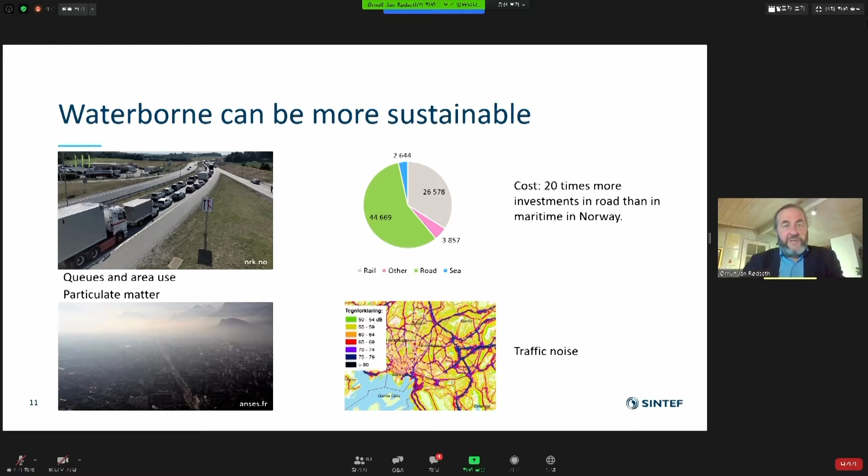So if we can make better use of waterborne transport, this can certainly help the sustainability goals of the cities. A very interesting point is to get a better utilization of the urban waterways. As I mentioned, a lot of the cities in Norway, as well as in Korea, are close to various rivers or the sea. And if you can build small boats that can replace bridges, you can get a much more flexible and cost-effective transport system, utilizing the waterways in totally new ways.

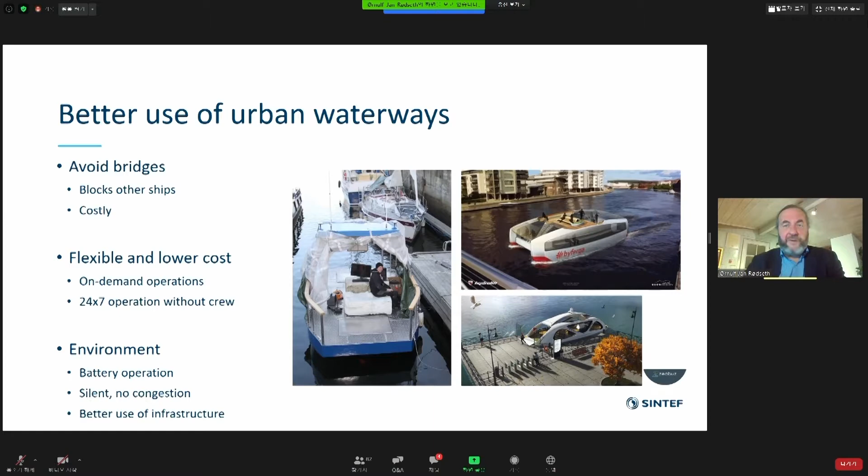So please come to Trondheim and have a look at that. It will probably have people on board for the first couple of years just to make sure that everything works as it should, but still the aim is to have a fully unmanned, on-demand ferry. It's about 60 meters crossing over a river, but you save about 15 minutes walking. So it's a very nice concept. This is something I've seen myself in, for instance, Busan. There's a lot of waterways that could be utilized much better if you have solutions like this. Certainly smart.

Another problem we are seeing in Norway is that the port areas in the cities are under pressure. It's high value real estate. They use a lot of area, and in the most attractive spaces. So many of the ports in Norway are now considering moving out of the city center to the outskirts of the populated area. And that, of course, causes a transport problem from the port to the city. The picture is from Trondheim.

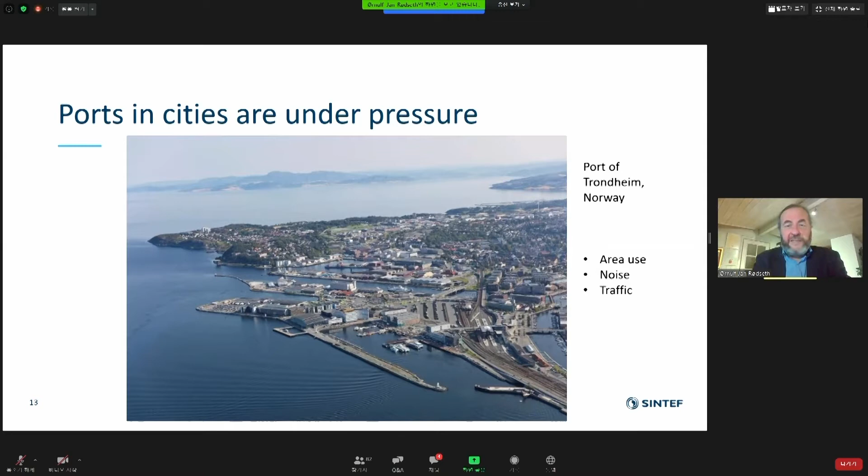So one of the projects we are looking at is: if you move the port out of the city, how do we transport the cargo into the city without using trucks? Again, smaller shuttle vessels sailing in protected waters fully autonomously seem to be an interesting option.

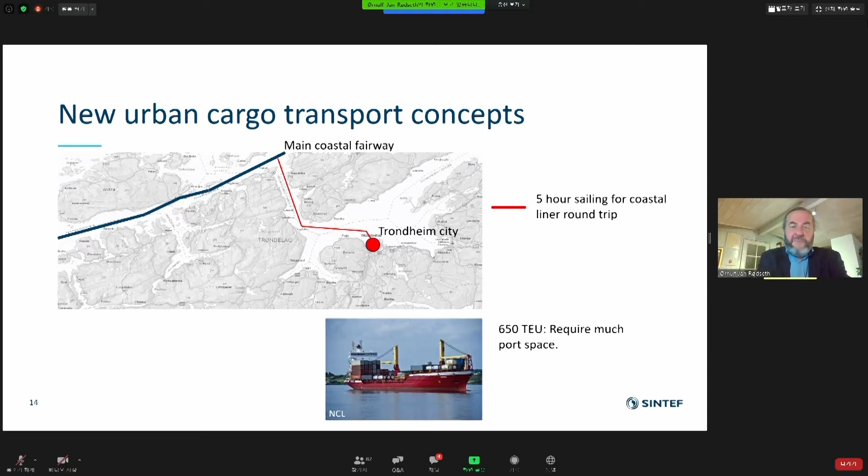We have a project based here in Trondheim. This is a research project, so we will not demonstrate it, but the point is to move the port out to the main fairway, and the big ships will save about 5 hours sailing into Trondheim and back again. While we can replace these with smaller unmanned ships with electric propulsion, very silent and small enough that you don't need the big terminal areas. It's more about delivering a container on the quayside and getting it up into the city immediately. Again, a very interesting proposition, I think.

And again, something that, for instance, could be interesting for Busan, which has moved the container port out of the city.

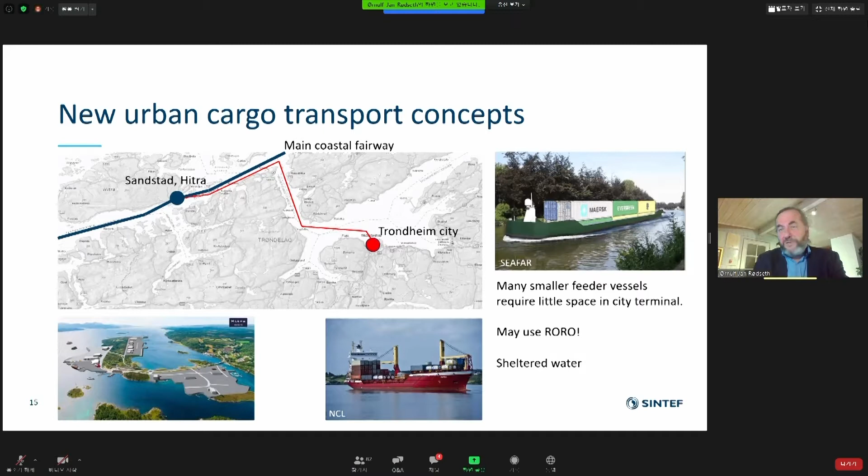So, to conclude, there are very rapid developments today in the area of autonomous ships. Some of you may have listened to the summit yesterday, and I think the basic conclusion we made there is that this is going relatively fast, although there is still some worries about how to use these systems in various applications.

It's a very high sustainability focus, both in terms of fuel use, but also in building new types of infrastructure. In my mind, autonomous and uncrewed ships are a game changer. It's disruptive technology that can change transport, at least waterborne transport, totally from what we are used to today. And one part of this is the sustainability focus on new types of infrastructures, which are more fitting to modern cities and the needs we will have there too.

Autonomous ships, new developments, offer new opportunities which are very interesting in my mind, at least for waterborne transport in cities, both for passengers and for cargo. So, thank you. That was my message for today.

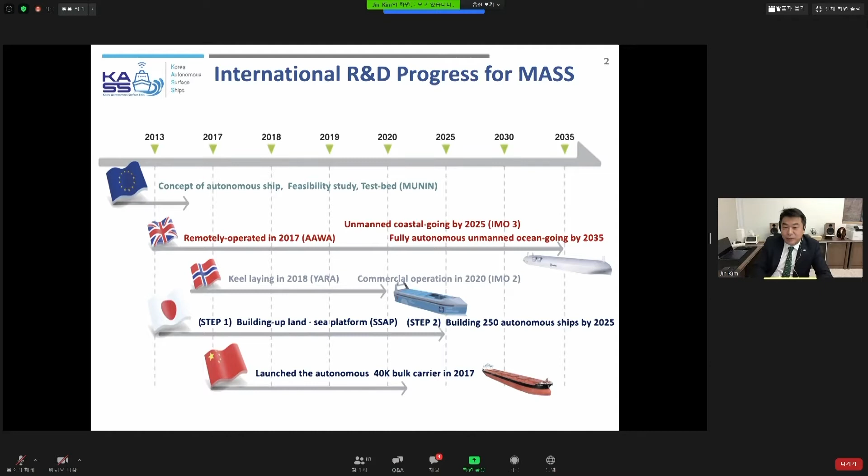Japan and China are also developing very similar concepts of autonomous ships.

Korea started the Korea Autonomous Surface Ship project, KASS. The project is jointly funded by the Ministry of Trade, Industry and Energy and the Ministry of Oceans and Fisheries, to develop MASS technologies consisting of 4 key technologies with 13 sub-projects. The time frame is 6 years total, from this year to 2025.

The vision of this project is for Korea to take the lead on future market share and international standards for autonomous ships. The first technological objective is to develop MASS equipped with an intelligent navigation system that meets IMO autonomy level 3 for ocean-going operations, and level 2 for coastal operations.

We will make efforts to achieve global level reliability and standardization, expecting Korea to take the lead in MASS market share. For these objectives, we launched the National KASS project, consisting of 4 key technologies: autonomous navigation system, autonomous engine system, sea test bed and validation technology, and operation techniques and standardization.

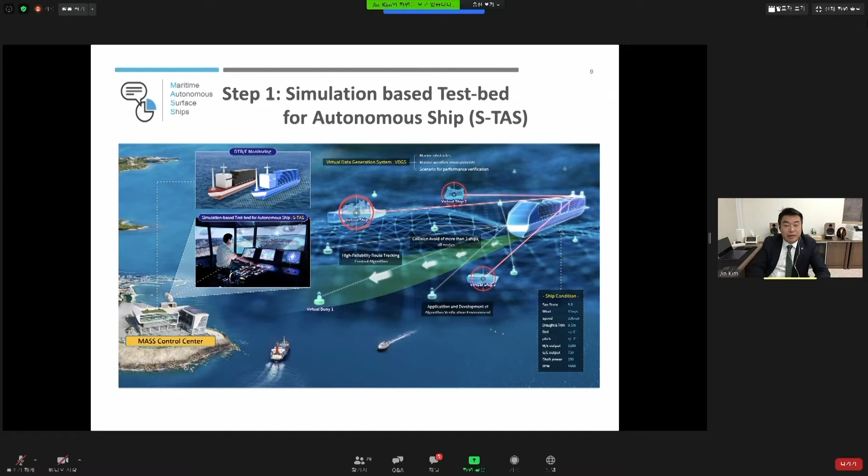The S-TAS system will be equipped at the MASS Control Center on shore. The next step is testing a real ship in a real ocean environment, where real ship and ocean conditions replace the virtual conditions of the simulation-based system.

Two real ships, a 24-meter class small test ship and a commercial ship provided by a participating shipping company, will be tested in this project. We can use both VDGS-generated virtual obstacles and real obstacles together.

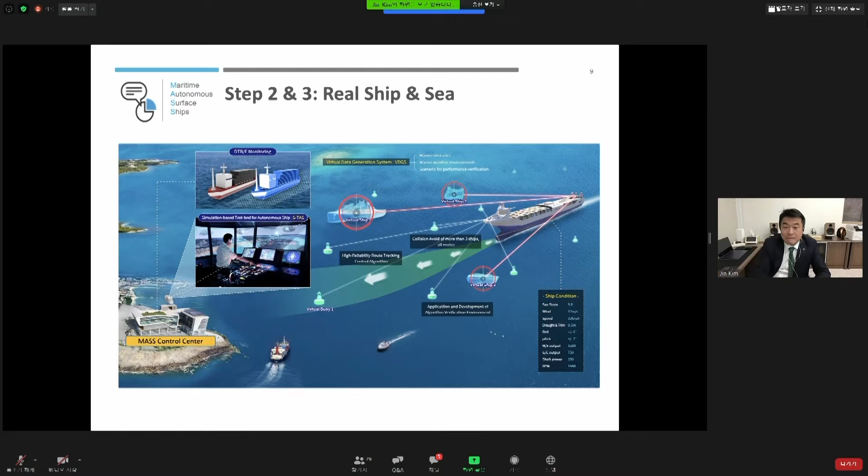The sea test bed, including the MASS Control Center, will be constructed at Ulsan City, on the southeastern coast of the Korean Peninsula, very close to the Ulsan shipbuilding yard of Hyundai Heavy Industry.

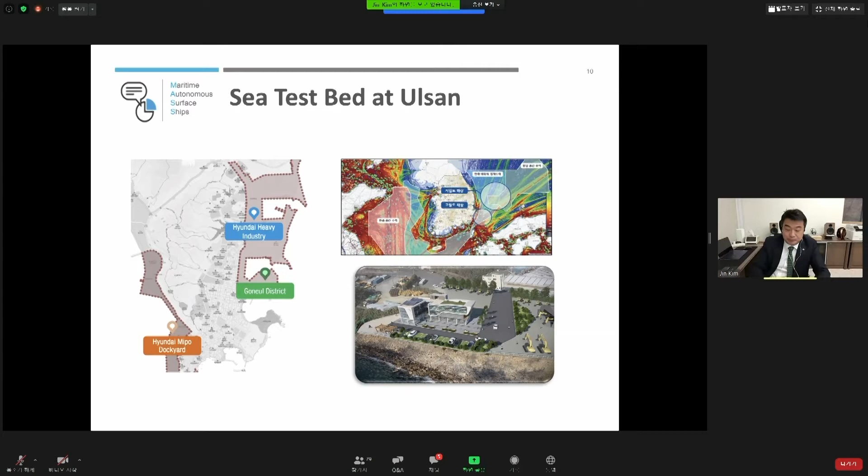However, the engine automation system is not easy to test and validate with a small test ship. So, at this stage of technology development, we'll use an actual full-scale size main engine within a simulated environment.

Various big data, including intentional and unintentional malfunctions, will be collected. This big data will be used to develop a condition-based management (CBM) solution with AI technologies.

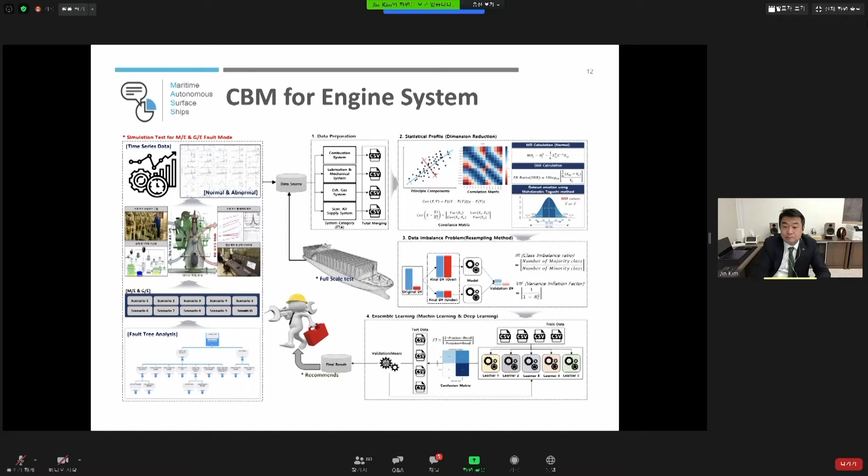The digital bridge and platform on the shipboard, and the digital twin bridge at the MASS Control Center, will communicate using various types of communication systems. We also developed a cybersecurity system, which will be applied and tested for both the digital bridge and the digital twin bridge.

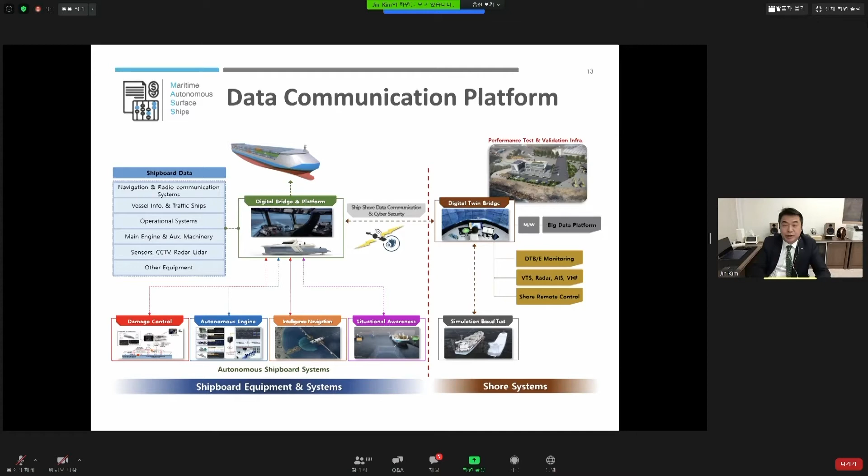The shipboard digital bridge collects all data and intercommunicates with the intelligent navigation system and engine automation system. The digital twin bridge at the MASS Control Center collects all shore data, including VTS information, operates a big data platform, and will have remote control ability in emergency situations.

This is the concept drawing of the sea test bed at Ulsan City. The Mass Control Center will have a digital twin bridge and a big data platform, communicating with the shipboard digital bridge. We'll develop test scenarios and procedures to validate the intelligent navigation system and engine automation system, including cybersecurity.

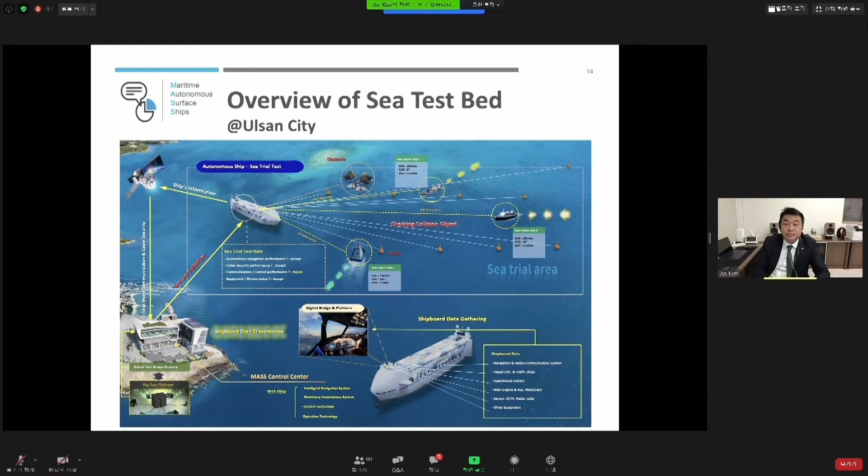The Korean private companies will have R&D products such as engine automation system, situation awareness system, intelligent navigation system, and communication system, etc.

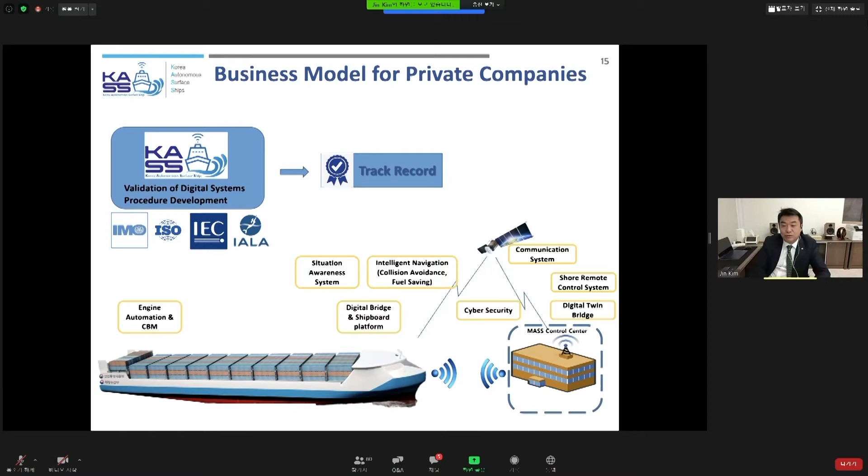The commercial operation of MASS in the future will strongly depend on how to get accreditation or approval in safety and security points. The KASS project will develop procedures for checking and validating all digital systems of MASS. We would like to cooperate with other nations to make the international standard of MASS verification, validation, and accreditation. The project will help participating Korean companies get the track record to build their own business models. Thank you.

Thank you, Dr. Jin Kim, for the wonderful presentation. It's really exciting to hear there is going to be actual shipbuilding to test autonomous ships. Before we move on, I have one small question for both Jin Kim and Arnov. Jin Kim, I know you're already collaborating with Norway on autonomous ships. Where do you see that collaboration coming to an early stage?

Actually, we are doing very similar research work in both Korea and Norway. At this moment, I would like to suggest two types of cooperation. The first is about the validation of the MASS digital system. We've all heard of successful operations of MASS, even unmanned ones. However, there is no procedure or validation method to get approval for international voyage yet. So I would like to cooperate to set up a procedure for validation of the MASS digital system, for example situation awareness or collision avoidance.

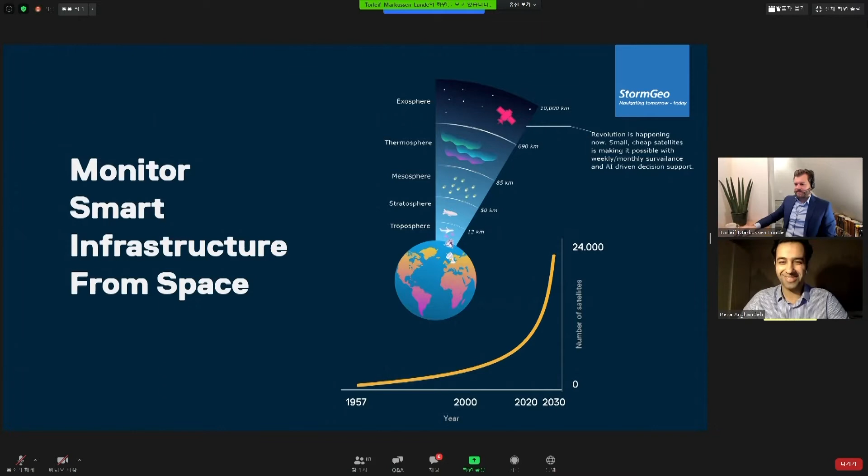When it comes to the electric grid, we see vegetation as one of the major reasons for outages and basically faults or some kind of risk in electric grids. The reason is that in a lot of places, the transmission and distribution lines pass through cities, fields, farms, mountains, and nature, and they get exposed to the vegetation.

In a lot of cases, these locations are far or hard to reach, or maybe because the network is so big, so vast, it's not easy to check every point of the grid. Electric utilities around the world spend between $50, $60 to $1,000 per kilometer of line for inspection and cleaning the power lines regularly.

And the way they do that is basically by dividing the power line right of way into different zones, like the awareness zone, notice zone, and alert zone, where the tree or branch gets so close to the line, and they try to keep the line clean.

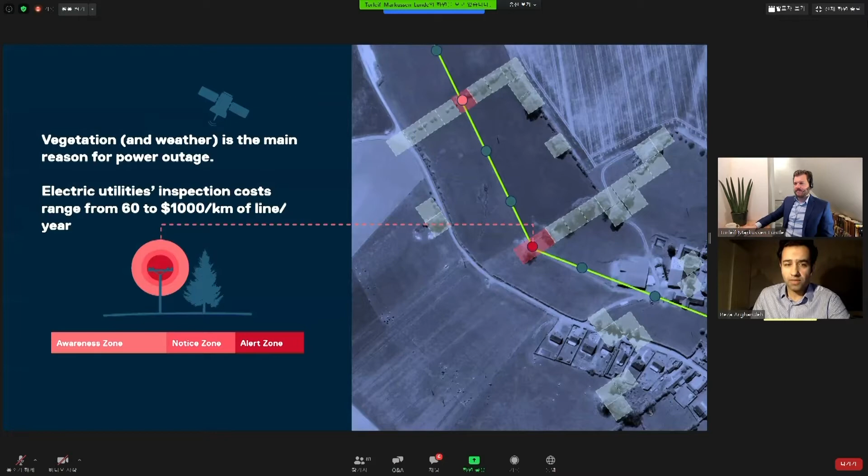So we developed an artificial intelligence algorithm to automatically extract the vegetation location - where it is, how far it is from the line, and how much risk it poses for the electric lines in different environments and vegetation coverage. To give you a sense of how this algorithm works, on the left-hand side we have this animation, and you can see a sliding window move along the line and look at the satellite imagery, measuring, characterizing, and calculating a risk function based on the threat from vegetation around the power line. It then comes up with a color code similar to what you'd see on Google Maps or navigation software showing traffic congestion, but in our case we provide vegetation-based risk for power lines.

In that way, as you see on the right-hand side, we picked an area again in the western part of Norway, because we are working with the electric company there. We show that we provide this kind of risk-based map for the grid operator, and they can see red zones where they need to pay more attention to vegetation and provide more insight. You can see that 95% of the locations are clean - they're green - meaning they don't need to send a helicopter, ground patrol, or drone to do inspection and spend a lot of money and time getting this imagery. With one satellite image, at a fraction of the cost, we provide them situational awareness, so they can optimize their costs and just pay attention where it's needed, maybe sending a drone or helicopter only to the red zones.

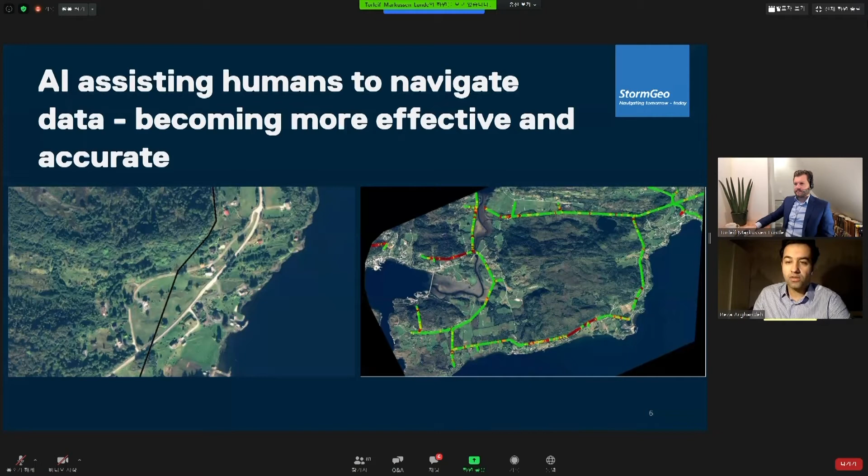We also went beyond vegetation management for the electric grid. We looked at urban areas too, and tested our satellite-based AI algorithms for estimating the impact of hurricanes and storms on cities. For example, for Hurricane Michael in Florida, we used these algorithms to see the level of hurricane destruction on a city after the hurricane.

Just to show you an example, the left top image is part of a road, and the left bottom side is what a machine using our algorithm will see in that area. You can see the color code - the light color shows the location of trees, the roadway, and the buildings. After the hurricane, we can clearly see a tree cut the line, cut the roads, and consequently cut the power lines, causing a road closure and power outage. Using this satellite imagery technique, we could estimate the destruction of the hurricane across the whole city very quickly.

The reason we are interested in and believe in using high resolution, high quality satellite imagery rather than drones or helicopters is that after a massive natural disaster, because of weather conditions, drones may not be able to operate. They're also limited by battery range, size, and other technical aspects. However, with satellites and technology like SAR, which can go through clouds - even if we have cloud coverage as an obstacle - we can get a very clear and reliable image of the situation on the ground, even after disasters.

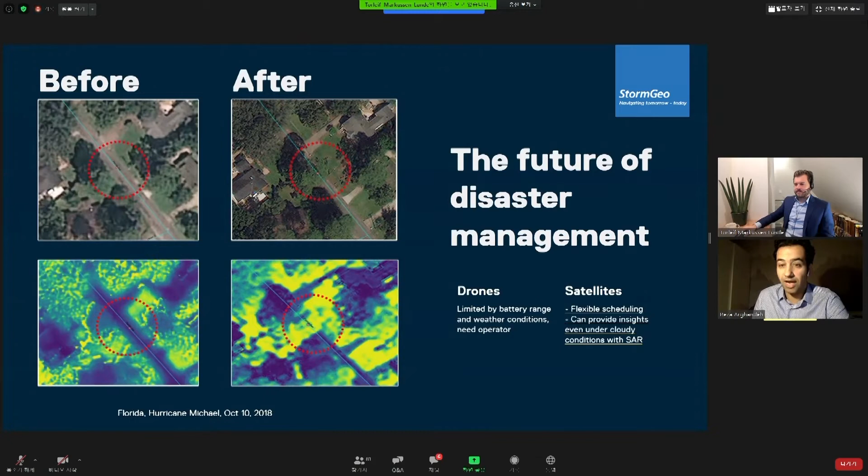I think that's it. Torleif, anything else you want to add? No, I think that was very good.

So that is one of the areas that we work on, combining the weather data together with information on where the vegetation is, adding another dimension to get a good understanding of the risk.

I would say a thriving, functioning port is key to a smart city. And likewise is data sharing and utilizing the data you have at hand to automate and make the city smarter. So I think the port, just like the water and the waterways mentioned earlier today, and the ports and the shipping industry, is a very important part of making a city smart.

So to mention a little bit about what StormGeo do today. For the shipping industry, you typically start with the planning of a trip, or maybe multiple trips, and then you have the possibility to optimize around the planning. Today we do a little bit of work here, but the majority of the services that StormGeo provide today is in the ship operations part - that is after you have left the port and when you're on your way to the next port.

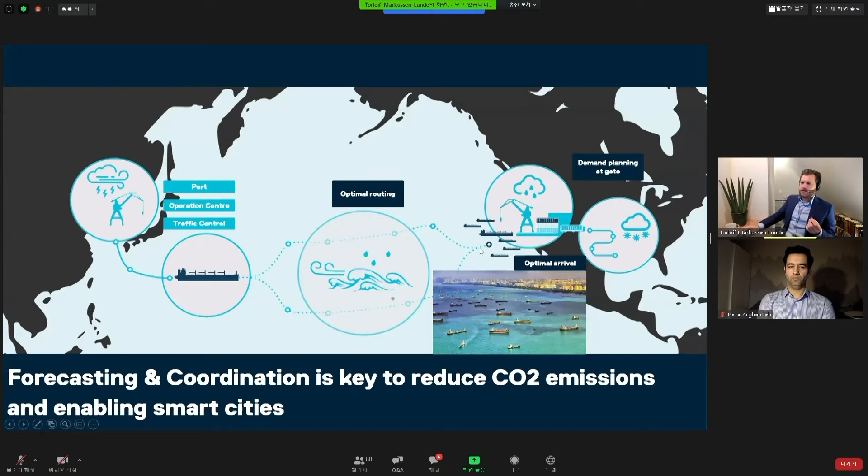To finish off with this slide here, to repeat the message: the shipping industry and the ports are an essential part of the smart city, and so is the weather. Optimizing for the weather, optimizing the ports, optimizing the shipping industry is key. And we at StormGeo see that to enable this reduction in emissions and the smart cities, there is a need to collaborate and share data, and we are definitely looking for partners and willing to do that.

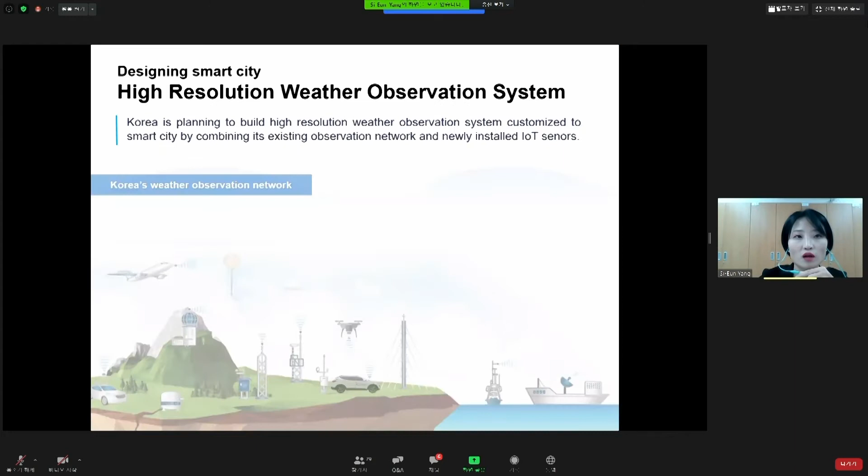The first project's title is Designing Smart City High Resolution Weather Observation System and Weather and Climate Platform - the title says it all. The first task is designing the smart city high resolution weather observation system. As you can see in this picture, Korea has a very well equipped meteorological observation network - over 600 surface observation stations, 15 weather radars, 25 upper air observation stations, and marine observation stations as well. Recently, we even have a meteorological satellite, which means we have a very dense meteorological observation network, much denser than the WMO recommendation.

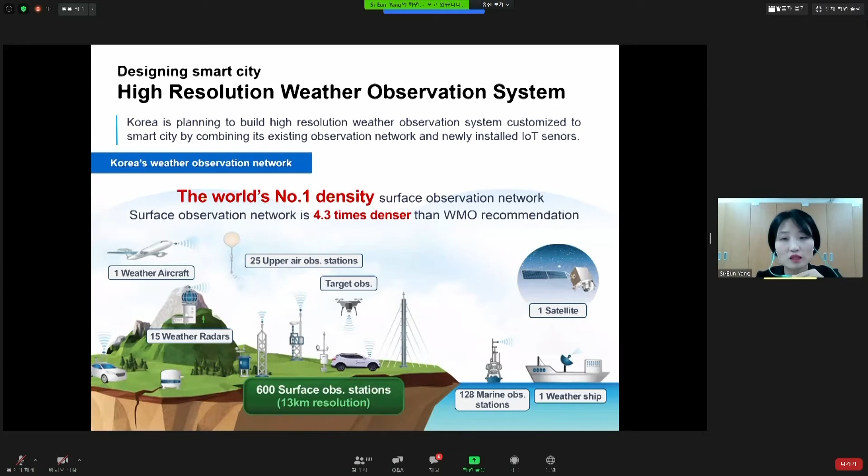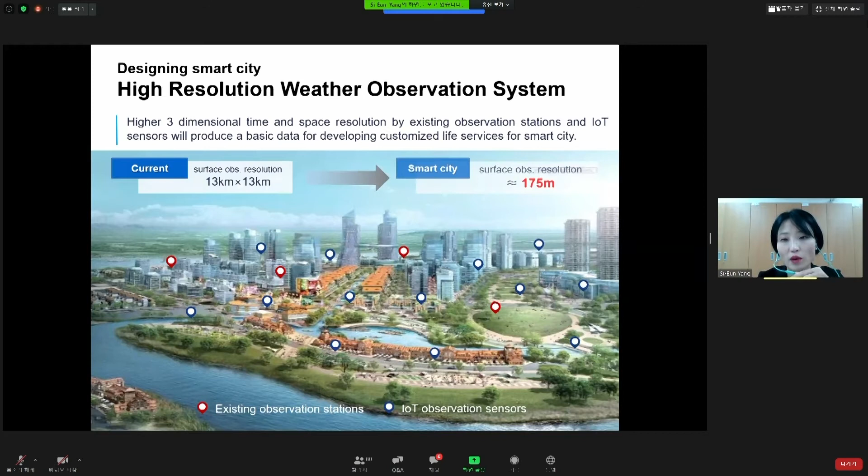What we are going to do with this existing observation network is combine it together with the newly installed IoT weather sensors. Let's say this red dot is the existing observation station, and following the implementation plan of the Ministry of Land, Infrastructure and Transportation in Korea, they are going to build much more IoT weather sensors in the National Pilot Smart City. By combining these observation networks together, we could improve the resolution of the observation network, currently from 13 by 13 kilometers up to 175 meters, which is very dense and high resolution.

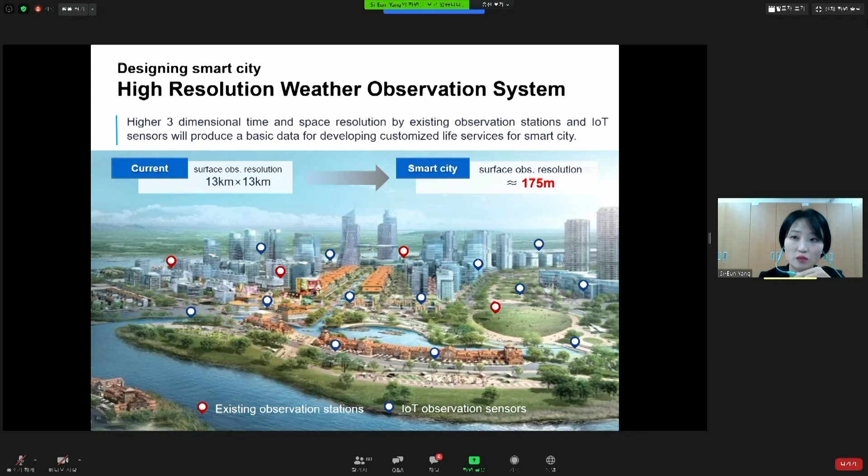So what do we need to do next to build this high resolution observation network? We need to develop technology to converge these two observation networks together, because the IoT sensors don't have a standard methodology when they observe the weather event. So we need some technology to connect this data together to make it the same standard.

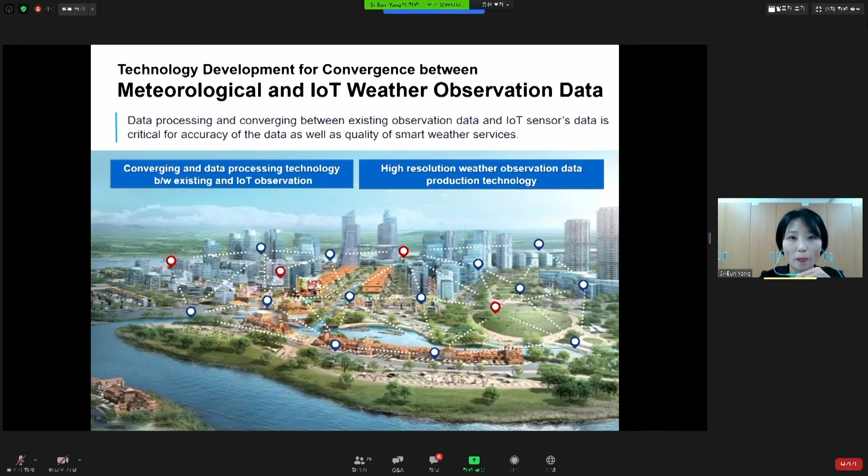And to secure the accuracy and reliability of the data, what we need is quality control. So our research project also contains this quality control methodology development. And how could we do that?

First, we are going to do comparative observation with the two IoT sensors together with the existing observation station, at least for 3 months. By doing so, we will see the accuracy of the data from the IoT sensor, and we will also check the error range.

We are also going to develop the QC algorithm and verification methodology. Actually, KMA already has our own QC methodology, so based on that, we are currently designing the prototype for this methodology and algorithm as well.

And the last thing would be building metadata and the standardization methodology. I'll introduce this later, but we also have to connect this massive observation data to other data platforms, so we need this job as well.

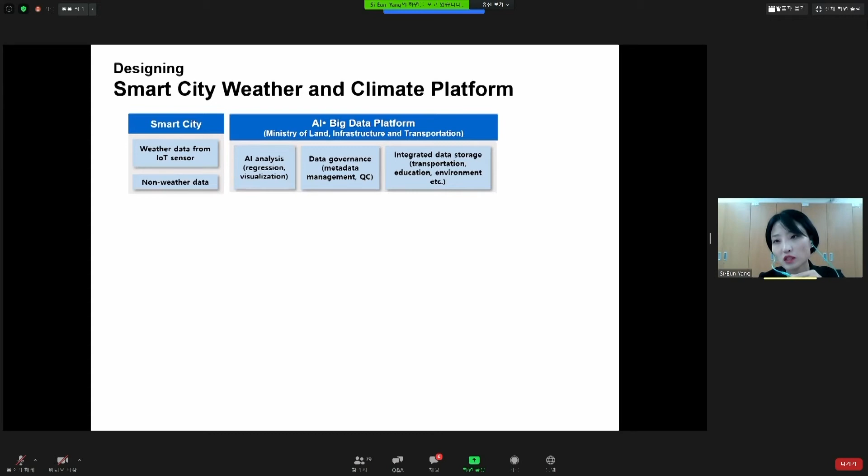And the next task for this project is designing a smart city weather and climate platform. The Ministry of Land, Infrastructure and Transportation, which is the major entity for developing the National Pilot Smart City, is going to build the AI big data platform.

This platform will integrate all the data needed for the smart city, such as transportation, education, environment, healthcare, and so on. They are going to use AI analysis and extract meaningful information for users in the smart city.

And what we are going to do with this big data platform is use our existing observation data and newly collected observation data from the IoT weather sensor. We will integrate it and upload all this data into the smart city weather and climate platform.

And this platform also has a meteorological digital twin. I will go over this later.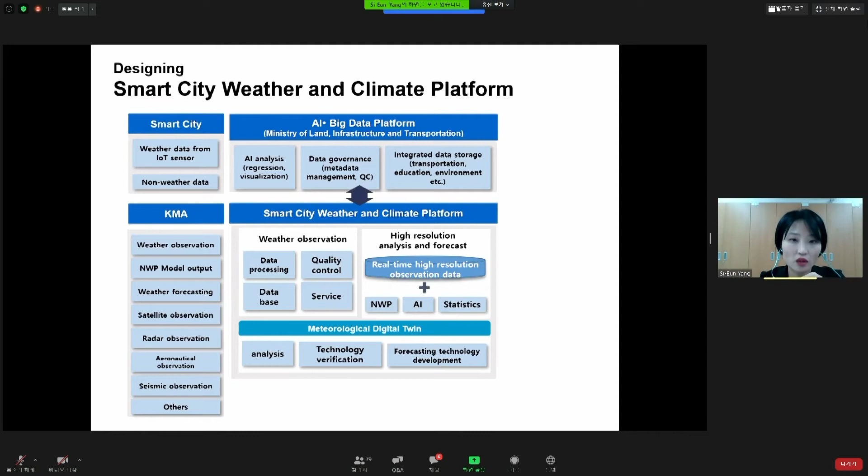We are going to connect this weather and climate platform with the AI big data platform, and also the meteorological disaster prevention portal operated by KMA, and the weather and climate big data center operated by my company KMI. And we will provide meaningful information to the users.

And next is our second project. The title is Prototype Development of Smart City High Resolution Weather Analysis and Forecast System and Weather and Climate Convergence Technology.

So in the previous project, we designed the prototype for the high resolution weather observation system. What would be the next stage? The next stage would be weather analysis using this observation data to produce forecasts. So this project is about that part, and how we could do that.

We are going to use mainly three technologies. The first is the numerical weather prediction model, which is commonly used to produce forecast information. We are also going to use the newly collected urban weather information from the IoT weather sensors, and apply cutting edge technology like AI or deep learning. By doing so, we are going to develop a high resolution 3D weather analysis and forecasting system.

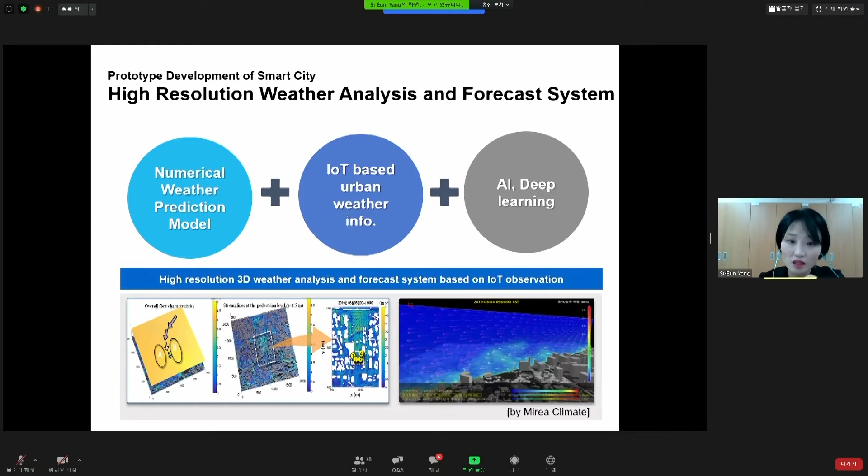And I'd like to show you a short video clip about this. I hope this will look good for you.

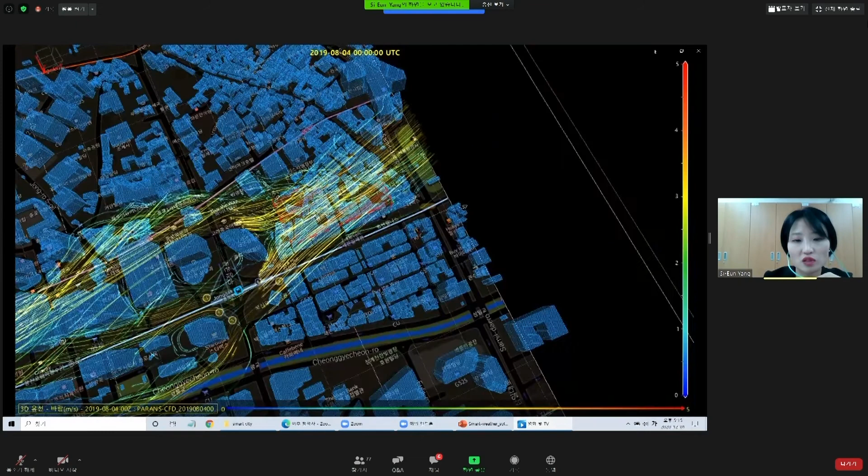This is a 3D map, and on this map we visualize wind direction and wind speed, and by color we show the temperature. So by using this kind of 3D observation, forecast and analysis system, we could see certain urban areas' weather conditions, and provide much more customized weather services for users in the smart city.

And the next task for our second project is prototype development and demonstration design of weather and climate convergence technologies. So what we need to do is identify what kind of weather services are required and needed for the smart city.

So in this R&D project, we are developing the prototype for fog detection based on AI. As you can see, by using the CCTV image...

We could detect the fog condition, and also one of our research partners, World Tech, is developing a road weather risk service also using CCTV images. We could extract weather conditions like this using some algorithm, and also give warnings for those who are driving.

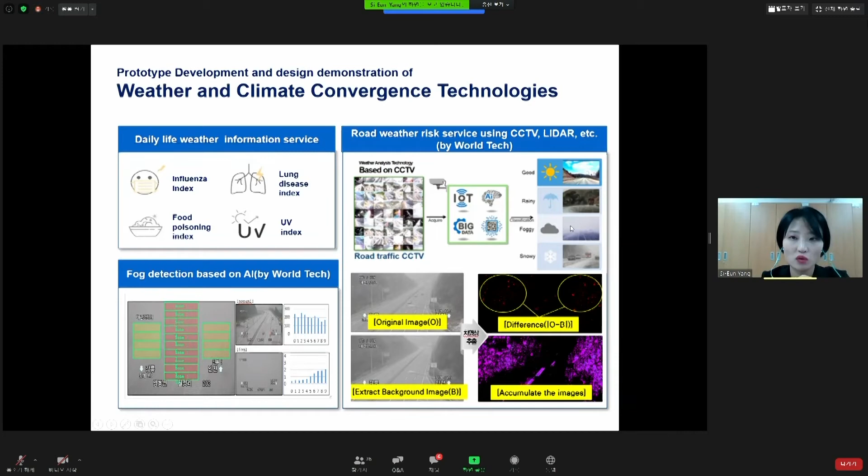And the last task is designing a digital twin for meteorological research. I'm pretty sure everyone knows what a digital twin is.

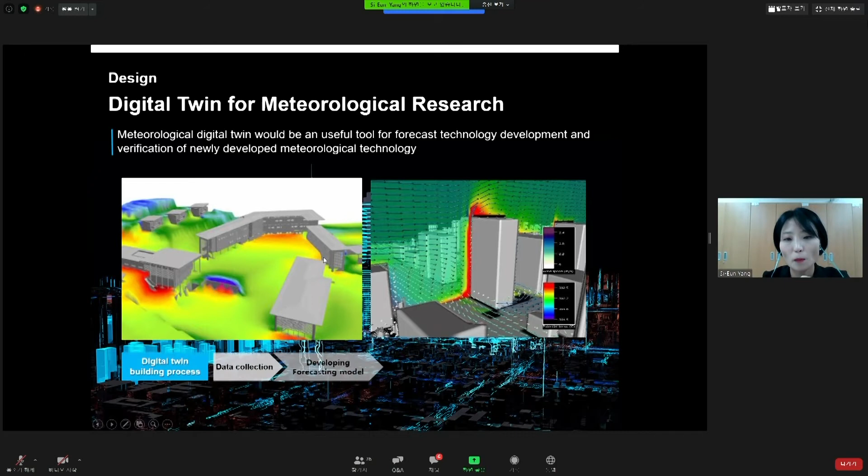What we are going to do with this is use it as a test bed for our newly developed forecasting technologies. By mapping results from our simulation or new technology, we could visualize and simulate the actual data from our newly developed technology. So this is what we are doing.

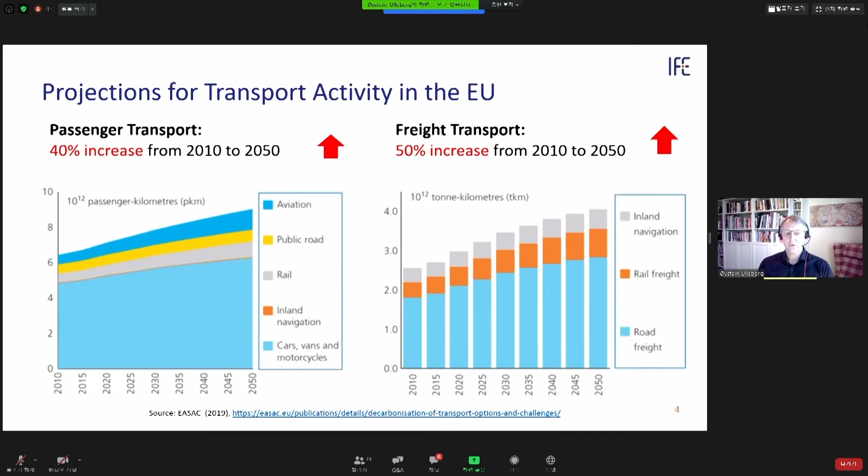To put it in context, we are able to reduce greenhouse gas emissions in Europe overall in the stationary sector, but we have challenges in transport. The projections for Europe actually show a quite significant increase—they're planning for an increase in total passenger traffic, as you see to the left, and also significant increases are expected in freight transport.

Obviously there will be challenges when we want to go to zero emission. I did a back-of-the-envelope calculation last year: what if we converted 250 million passenger vehicles in Europe to battery electric? That would be a tremendous challenge, because we'd need as much charging capacity as we currently have in total power production in Europe. So maybe not so realistic.

The rest of the talk, I'll speak about hydrogen. We also did a calculation to put it into context. If we rolled out hydrogen to a fraction of the fleet—today there are 6 to 7 million trucks and about 1 million buses—what would happen? We would have to put up quite a few hydrogen refueling stations. We've started this, but it's a huge task.

In Norway, the targets are to fast-track this. Since we have a renewable energy base close to 100% on a good year, we export hydroelectric power through sea cables down to the Netherlands and Denmark, and we're part of the Nordic energy mix. So we're in a very good position, with a lot of hydroelectric power and more wind power being built. That makes it easier for us to move quickly toward this electric situation, including electric transport—either battery electric or hydrogen electric.

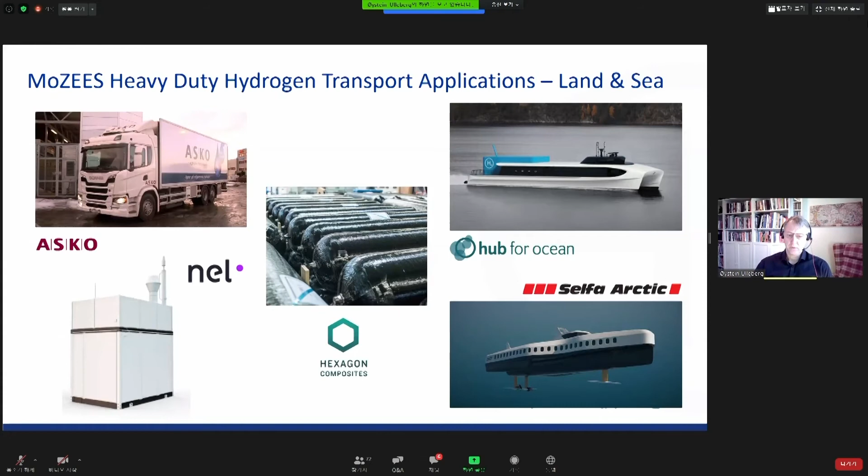I won't go too much in detail on this project, but I would like to bring to your attention that we started very early in Norway to make the system ready for hydrogen vehicles. Personally, I was involved in the light-duty vehicles. We had a development on a small battery electric vehicle that was rebuilt for hydrogen operations.

So we have the HY registration signs, and that applies then for the small-scale vehicles. We only have about 160, 70 passenger vehicles on hydrogen. But now there seems to be a stronger interest for the trucks and the buses.

So that's why I would like to take you into this, just to give you some examples of what we do in terms of maybe a little bit more high-level research for this audience, but we of course do detailed research all the way down to the component level and system development.

So one study we did was to see how it would look if we designed a system with water electrolysis along the route, so have some stations built in Oslo and in Trondheim, and then also along maybe a midway point. So we looked into this in detail to see what's possible with fuel cell electric trucks.

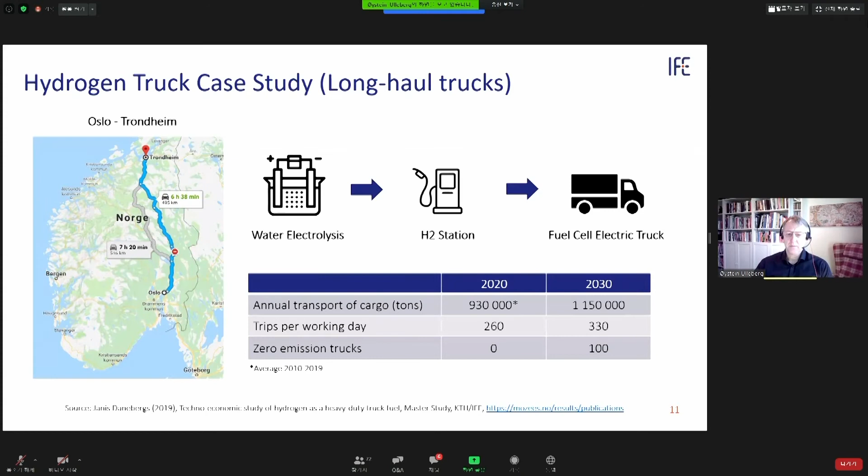And we looked at the transport demand today and the projection for 2030. Today, of course, there are no zero emission trucks. And then we said, okay, what would happen? Is it feasible, techno-economically feasible to do this with 100 trucks in 2030?

So then what you typically do is you look at the profile. We have tools to estimate the energy demand for these routes, and with more sophisticated technology it's very easy to do this these days. We can have simple or more sophisticated models of the vehicles to estimate the energy demand. And we figured out that the fuel demand for hydrogen was about 40 kilograms for this route.

So we are collaborating internationally with some partners on this vehicle modeling. I don't want you to pay too much attention, you can have it for future reference, but this lower left-hand figure shows when it is cost effective. Basically everything to the left of the black vertical line, where it breaks the x-axis at about 70 Norwegian krones per kilogram of hydrogen, is cost effective.

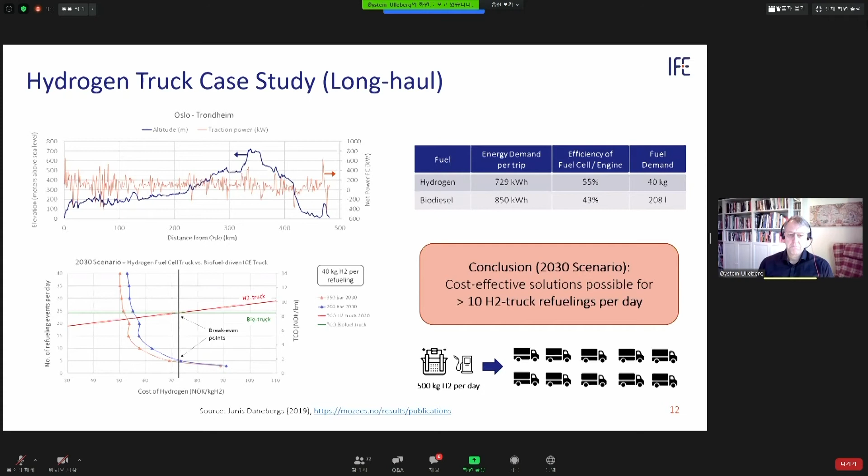This is the 2030 scenario. We weren't able to produce this plot for the 2020 scenario or the 2025 scenario. But what's interesting about this is that with the learning curves we see on the hydrogen refueling stations and the trucks, which are quite realistic according to our research...

Then it is possible to design a complete system where you have the trucks and you only need 10 trucks per station. So a relatively small station of half a ton of hydrogen per day would then suffice to get this cost effective. And this is very interesting.

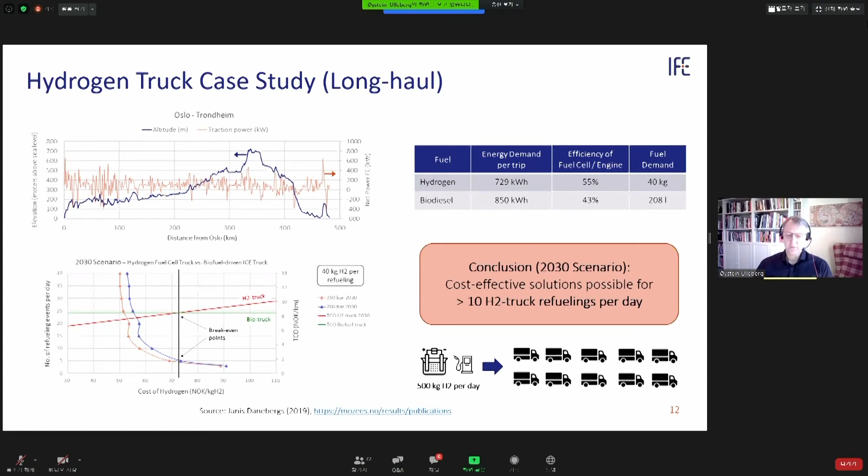And this complies with our theory that we need to think holistically when we build up these fleets, and build fleets first, because to make the production of hydrogen cost effective, you need a certain throughput. We've previously shown that you need about a ton a day to make a cost-effective station, and that station needs to be quite frequently visited. So building up infrastructure for fleets is a good solution.

We've also looked at this region, the Oslo region. The Oslo region, the capital region of Norway, including Viken, has a population of maybe 1.5 million, a little bit more. And there's a lot of traffic going through.

So we wanted to look at this, so we did a feasibility study earlier this year, and we're continuing this project now. We had some data from about 1,000 trucks. It's only 5% of the fleet in Norway, but at least it's a quite significant statistical amount. And we interviewed operators and looked at some scenarios.

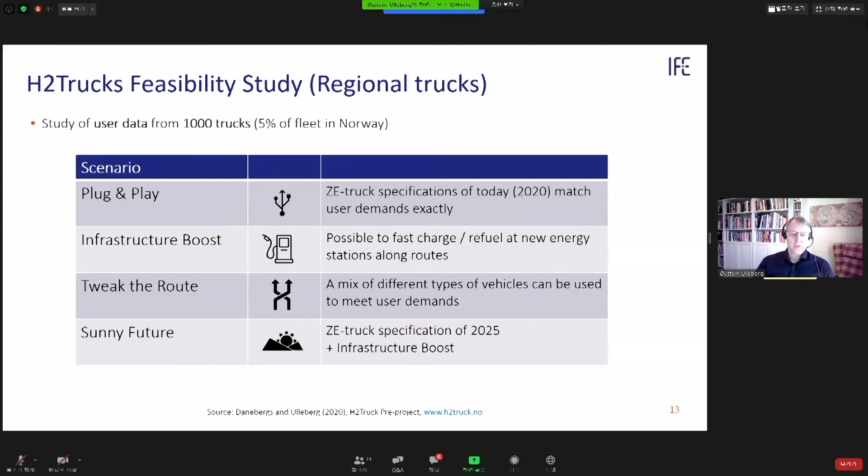So then we made an assessment based on technology availability, both on the vehicles and the fueling stations and the charging, fast charging for the batteries, and driving range, weight. Some trucks carry more weight, some carry more volume. We've looked into the details, and we are continuing these studies now for the capital region, because the city of Oslo is very interested. They actually have a plan now to implement zero-emission trucks in the capital region.

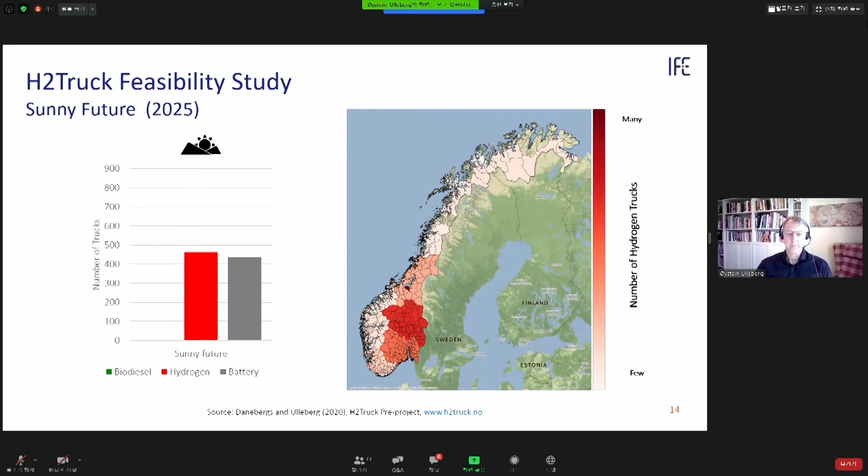Since this is such a big effort, we have joined forces and made a spin-out project out of MoZEES together with some key research partners, including SINTEF, the Transport Economic Institute, and the university in Trondheim. We are now looking at the three major regions in Norway: Bergen, Trondheim, and Oslo, and all the corridors between, to do an overall optimization of how we can solve the problem with battery electric and fuel cell electric.

Last example is on zero emission buses. Very ambitious strategy: the city of Oslo just announced that they will go for this. It's been politically decided that by 2028, there will only be zero emission battery electric and fuel cell electric buses. It's hard to say what the fraction will be. Right now we are mainly looking at battery electric buses because of technology availability, but we've looked at the whole fleet and see that there are quite a few routes that will have challenges with going battery electric, plus there's a heating demand in the winter.

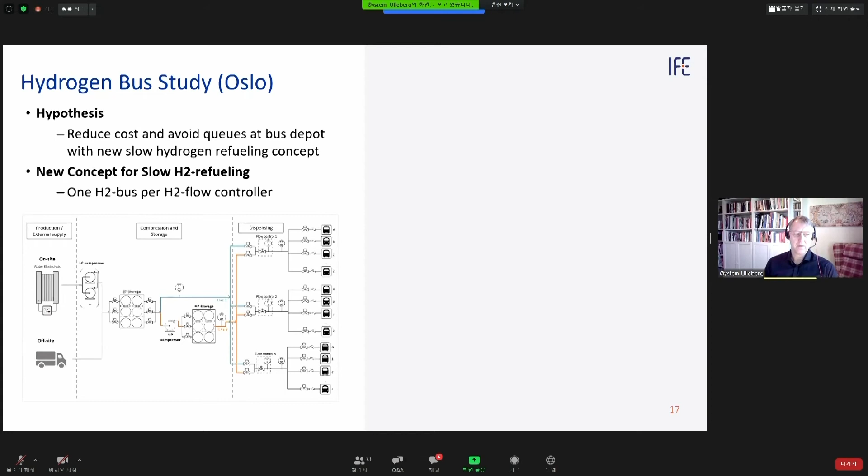There's also quite high infrastructure costs, not only on hydrogen but also on battery electric for fast charging. We also looked at an issue that is a bit challenging, and that is queuing. One example is the study we did with the city of Oslo and the region around, to see if we could come up with a more cost-effective solution for slow refueling, so part of the fleet could be slowly filled with hydrogen. We made a study on that and have a report that will be published soon. It shows that the total fueling cost of hydrogen really goes down if you can do slow filling at the bus depot.

Maybe this concept could also be applied to trucks, so you can do a combination of slow fueling and fast fueling to cut the costs.

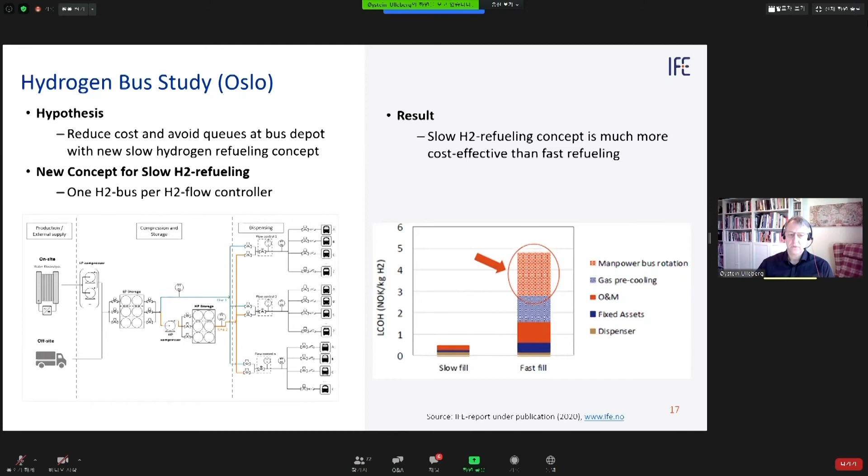So, conclusions: Norway has clear ambitions on the rollout of zero emission mobility and transport over the next decade, and we are looking into the possibilities of hydrogen fuel cells, especially for heavy duty trucks and buses. The main challenge we see now is really this optimization, and we're proposing different research projects on that.

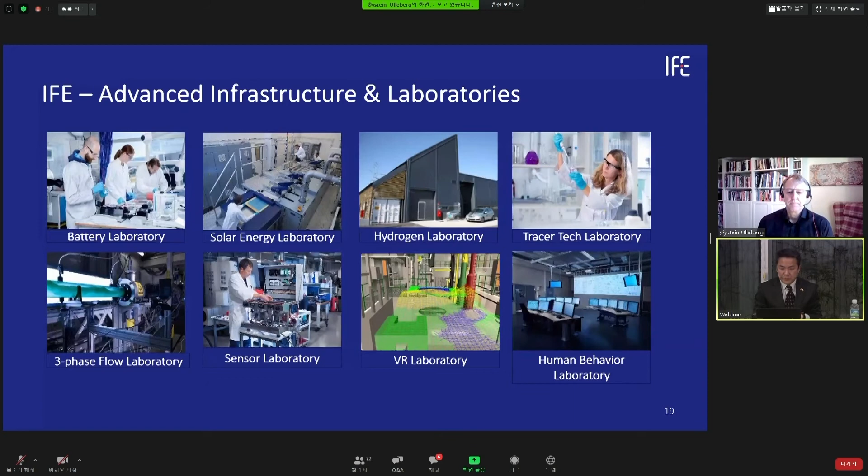Thank you very much, Øystein. That was very, very interesting. I have lots of things to ask you, but I will wait until Sae Hoon Kim's presentation and then ask both of you questions, if that's okay.

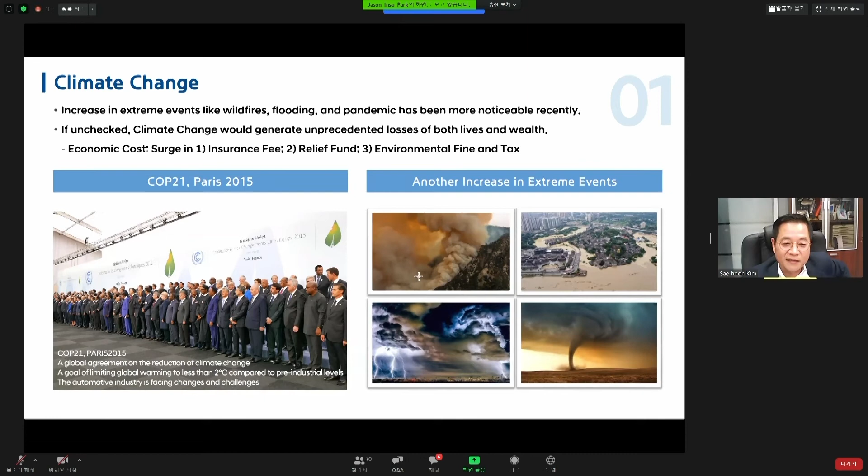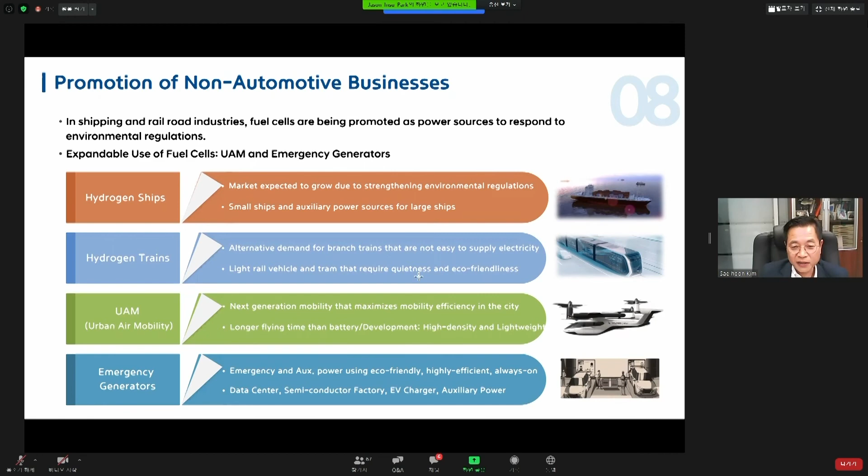We will invest also, and we are increasing our production capacity almost double every year. I hope we can meet this target. In order to meet this target, we need a clear government direction and investments from energy companies for hydrogen stations. Without hydrogen stations, it will not be realized.